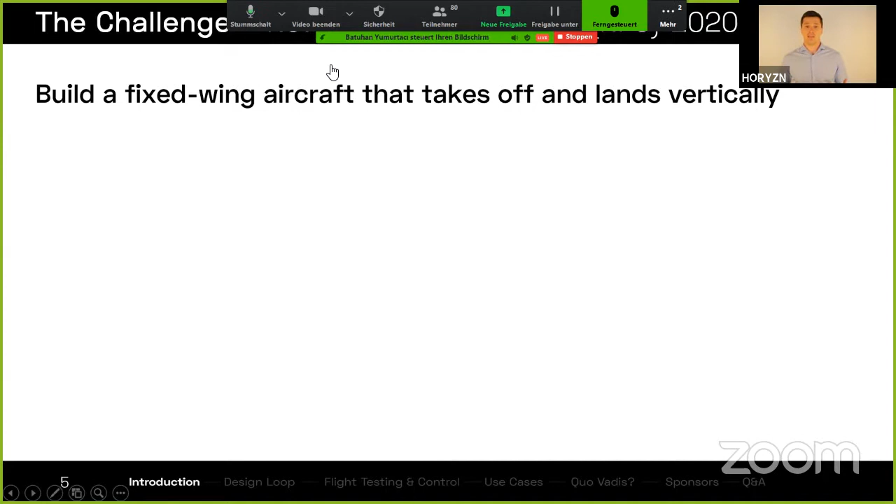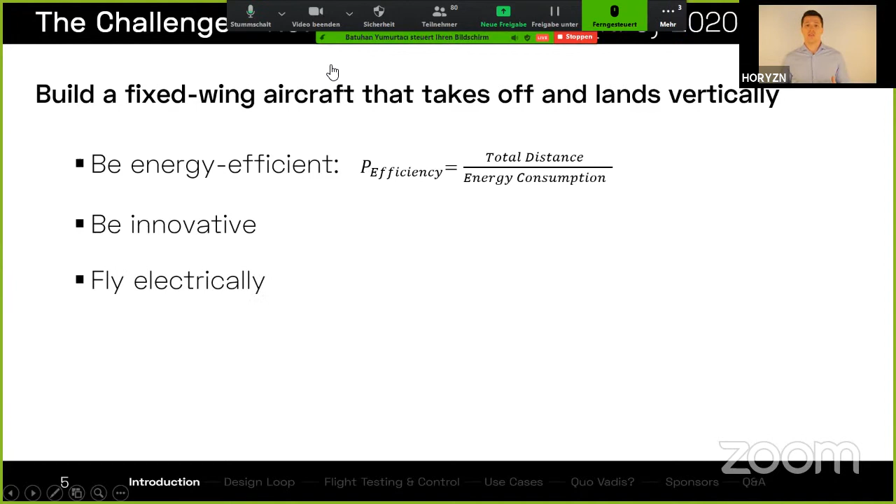Our story began about 8 months ago when we decided to participate in the NFC International competition. The task is to build a fixed-wing aircraft that is able to take off and land vertically. But our aircraft has to be energy efficient, and we get the most of our points for the flight performance, so the total distance divided by the energy consumption. We must also have an innovative design. We have to fly fully electric, and we must carry a 2-kilogram payload measuring about 1 meter. The competition will be taking place at the end of October.

The mission profile is quite challenging and includes taxiing, a 15 minute cruise flight with a minimum flight speed of 60 kilometers per hour, and also looping.

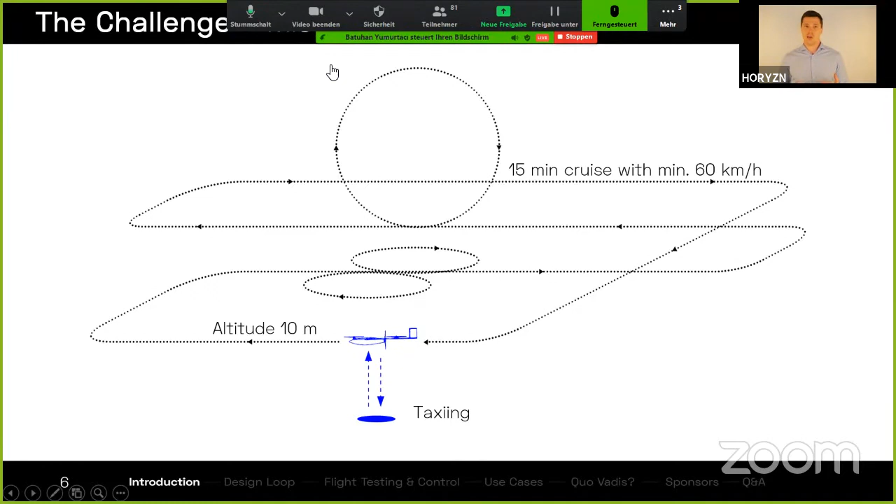So we put this team together. But who are we today? We are 29 bachelor, master, and PhD students. We are from 9 different nations. We are divided into 7 sub-teams, and we have one goal: to win the NFC competition.

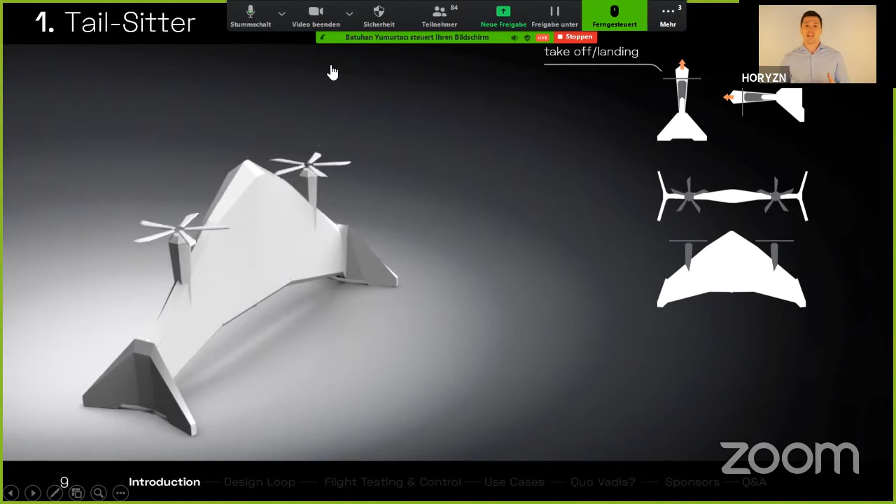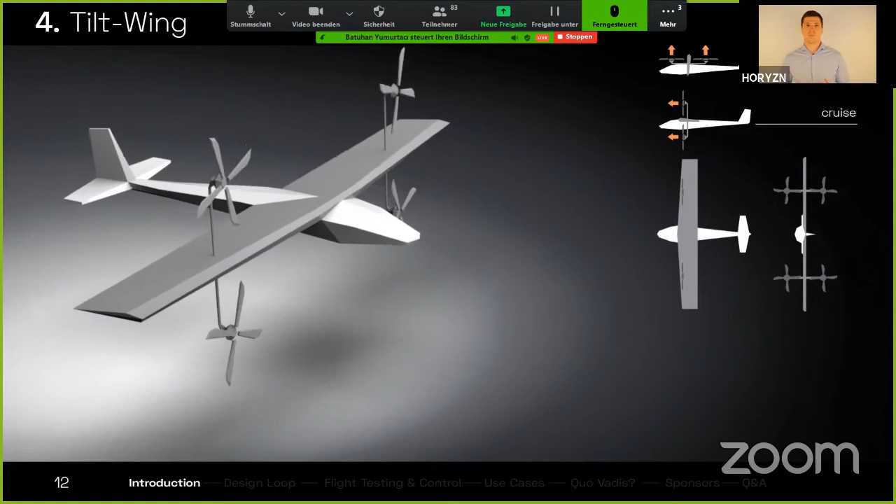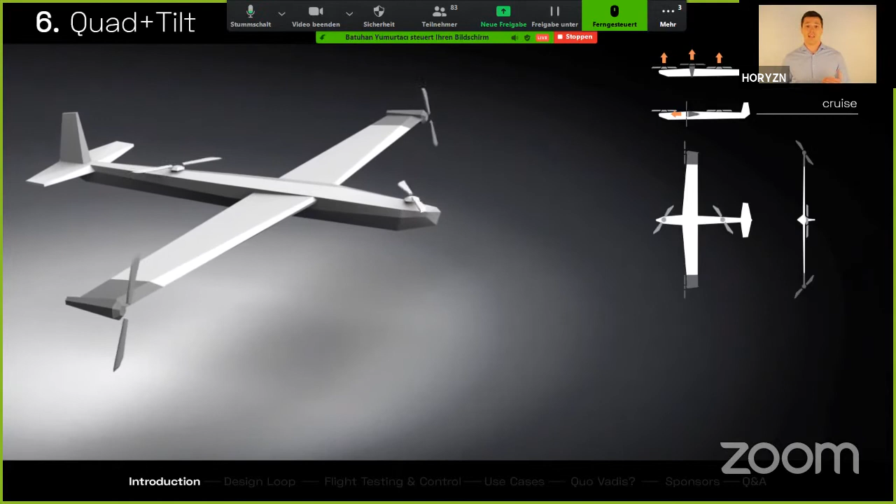So we started the brainstorming process to find an optimal configuration for our mission. We studied the following configurations: the tail-sitter, the tilt-rotor, the Kestrel, the tilt wing, the quadplane, and the Quad+Tilt configuration. From the quadplane and the Quad+Tilt configuration, we derived the final concept.

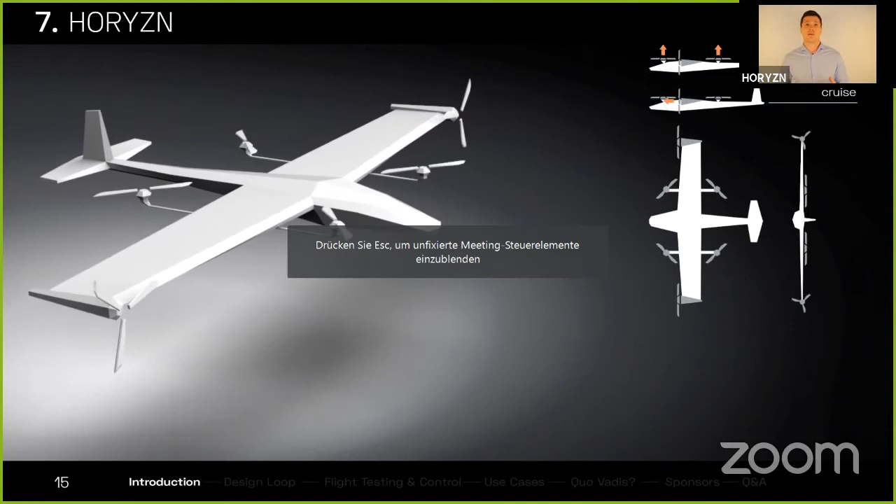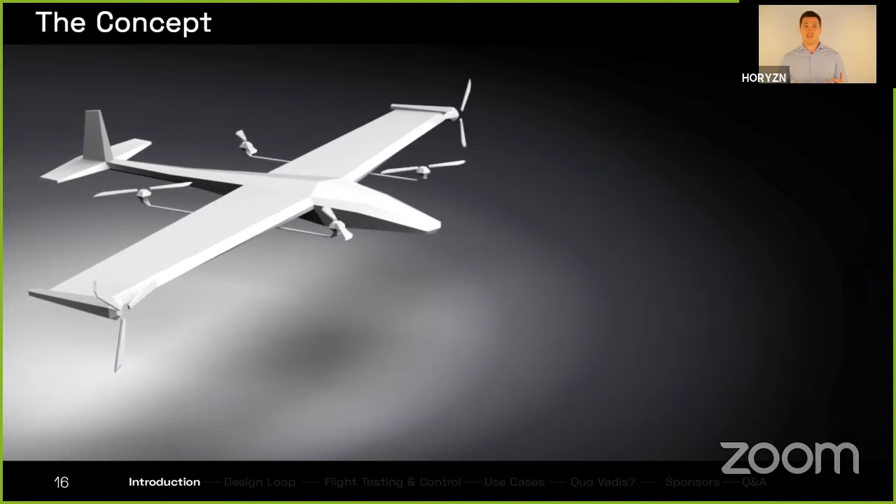I'm proud to say that we finally found a configuration that we called Horyzn. Horyzn is derived from its design goal to be ultra efficient. It deploys 4 hover rotors mounted on booms at the wing and 2 wingtip cruise engines. This innovative configuration combines the simplicity of a conventional quadplane configuration with high maneuverability during the hover phase and a high overall efficiency. The separation of the hover and cruise propulsion simplifies the system complexity, making it less complicated to design and safer to operate.

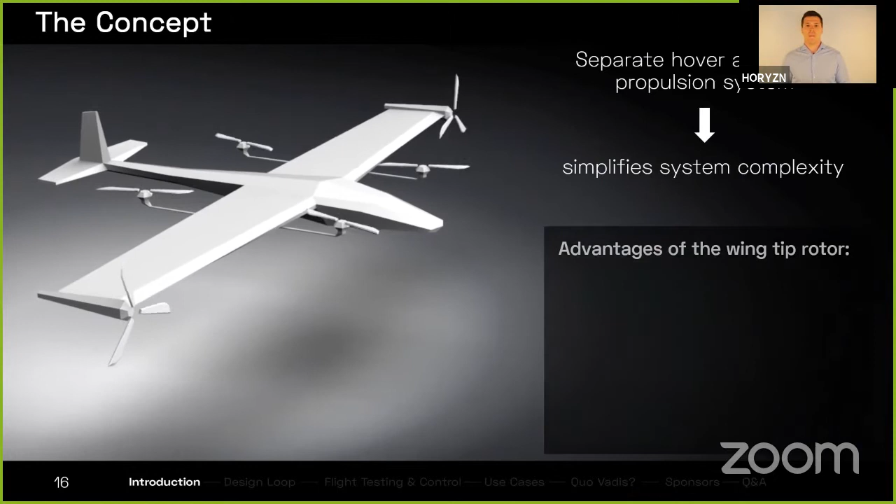But what advantages do we have with the wingtip rotors? Operating in completely undisturbed free stream conditions improves performance significantly. By interacting with the wingtip vortex, the proposed design partly cancels out the induced drag at the wingtip. Deploying differential thrust technology, a high yaw authority during the hover phase is made possible. This enables precise hovering and a high level of control that other configurations cannot provide. And since the differential thrust technology is also used during cruise flight, no rudder is required.

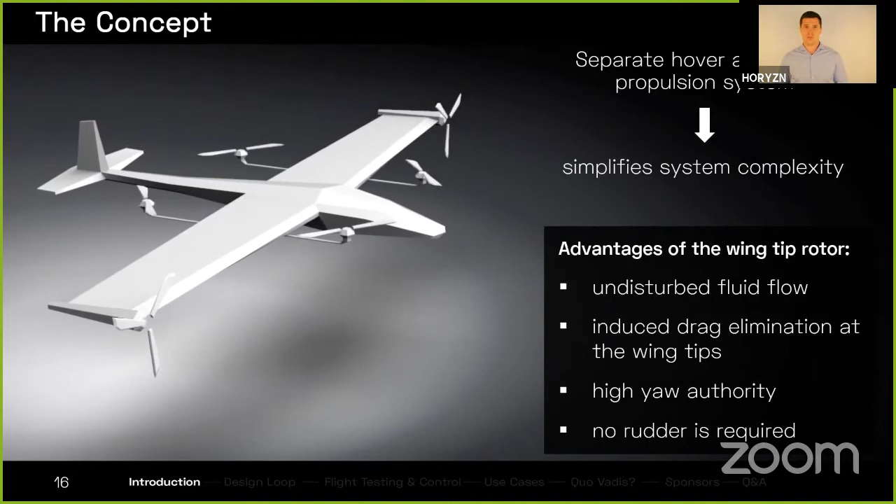So after we selected the configuration, we started the design process. But what does our design process look like, and why is it so special? To explain that, please welcome from the design loop team, Heitor Gardner.

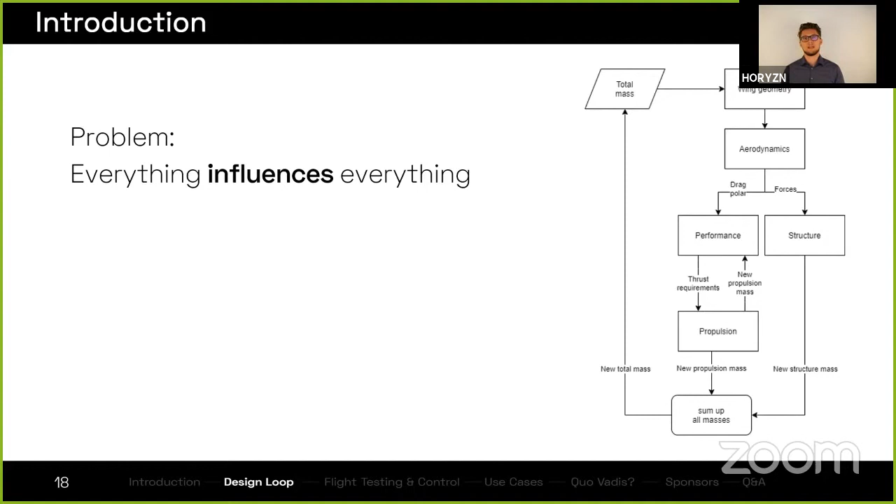Thanks, Balázs. Hello, everyone. So let's start with the design loop process, a quick introduction into this topic. The problem when we want to design an aircraft is that everything influences everything. As you can see in this chart on the right, we start with the total mass. The total mass influences our wing geometry, which then influences our aerodynamics. Later on, for structure calculations, you get a new structure mass. When you choose a propulsion, you get a different propulsion mass. And when you add those masses up, you get something different than you assumed at the beginning. So you have to restart the process all over again. This is called an iterative design loop, and this is what we implemented.

Now I'll show you how we implemented it in our case. We start on the left side with our inputs. Our inputs are the high-level geometry of the aircraft, for example, aspect ratio, wing loading, and certain points of wing and empennage geometry, along with our starting maximal takeoff mass, which is also kind of an output, that's why it's a circle there in the diagram, and also our mission segments.

Now into the design process, the high-level geometry goes into the geometry module, which is something specific for our case. We get into that in a bit. And together with the mass, we go into the aerodynamics. The aerodynamics gives a drag polar into performance and propulsion, and also the forces into the structure.

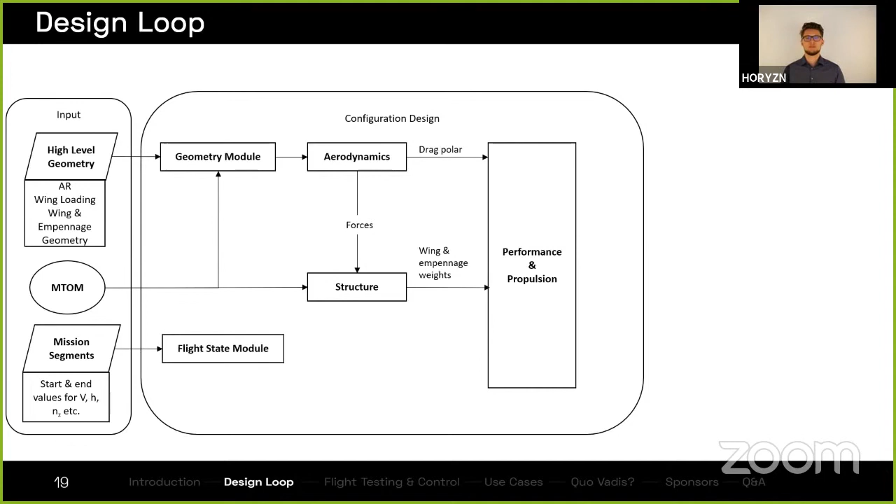And the structure gives us new wing and empennage weights. On the bottom, our mission segments go into the flight state module, which gives flight states into the performance and propulsion calculations. There we receive a new propulsion weight, sum all the masses up, and see if it converged. If it did not converge, we start the process all over again.

And if it converged, then we have one converged configuration. We also know how many points we'll achieve with that specific configuration, because this is actually what we want to optimize for. We want the maximum points possible.

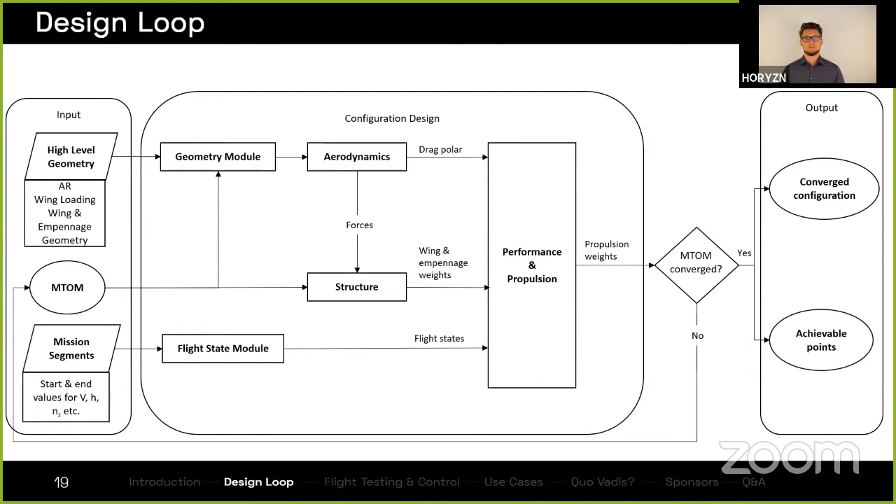So let's go into depth into the applied technology here real quick. We use state-of-the-art software, for example the PAWAT tool from Bauhaus Luftfahrt, which is a 3D aerodynamics calculation tool. Also a big thing here, we use CPACS from DLR, which is an XML-based parametric data exchange format. Together with that, we use Tigl and CPACS Creator, which is also part of that toolbox. We also use the RCE program from DLR, which can do a lot of things, but we use it as our toolchain manager to implement our design loop.

So what's special about our design loop process is that the setup is modular. We can model different aircraft configurations, different mission types, and we can also optimize for different criteria. This gives us huge potential for future applications, for example different competitions or whatever the future might bring up.

Now let's go into the modules of our design loop. We start here on the left with the inputs, and the first module is the geometry module. What happens there is that we have the high-level geometry as an input, which is written inside the CPACS file. We can see a part of that here.

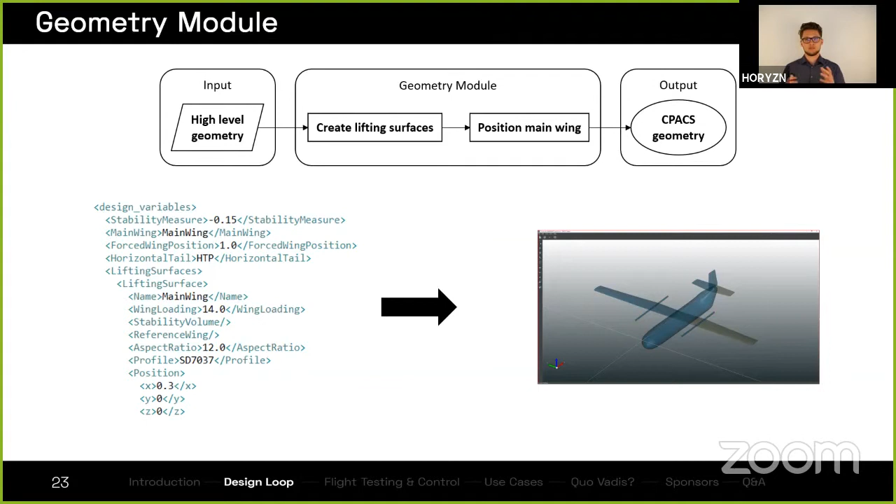It's just XML format. Inside the geometry module, the lifting surfaces get created, and the main wing is positioned so that the stability margin is maintained. As an output, we have the CPACS geometry, which we can see here in the Tigl viewer. In this format, we can actually continue to perform calculations.

Next module is the flight state module. As input, we have our mission segments. For each segment, we have start and end altitude, acceleration, and so on. We also have our operating conditions, for example the flight box size that is given by the competition.

Inside the flight state module, a trajectory gets generated, and as an output we have our flight states. So we know for each trajectory point how fast we're flying, what's the acceleration, we know the flight path angle, we also know the time between two points and so on. With that, we can actually do performance calculations.

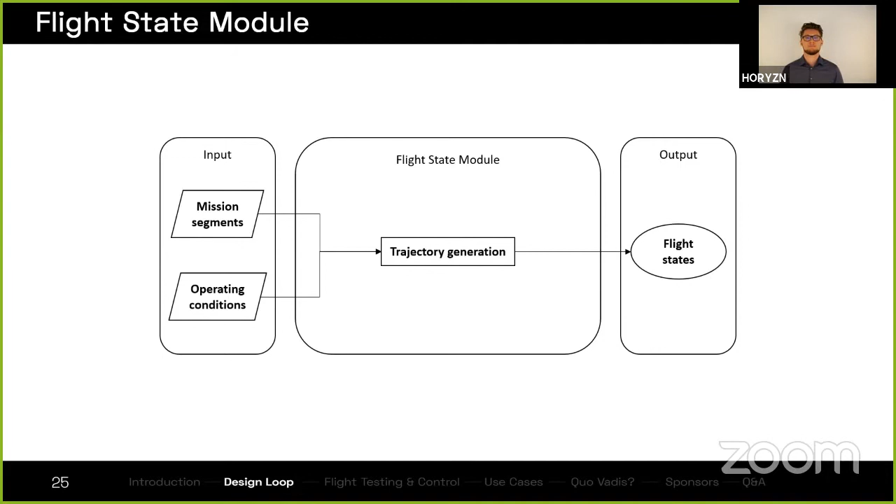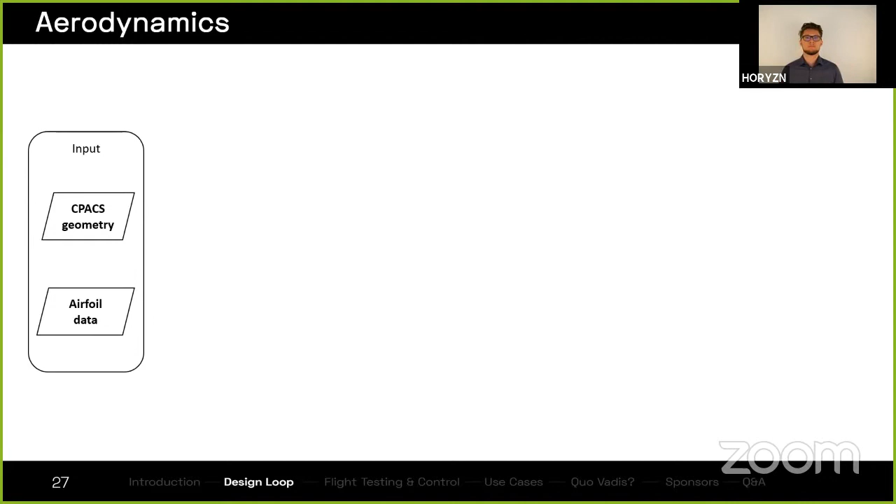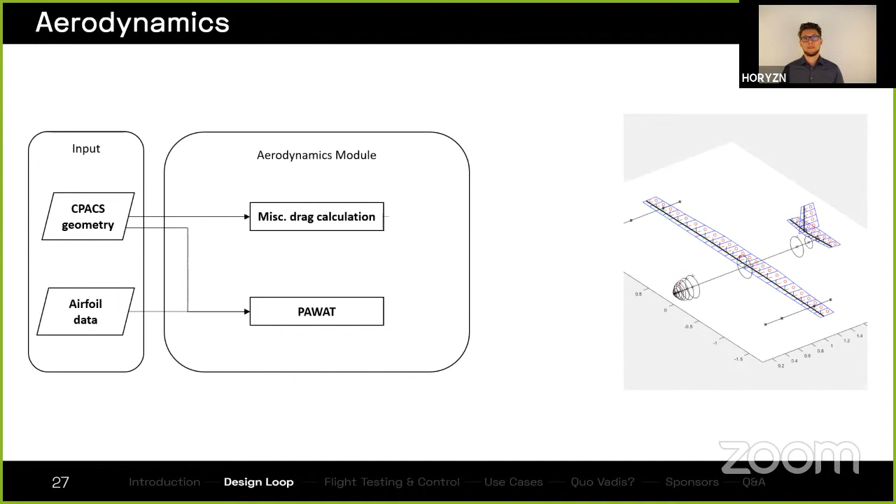Next module is the aerodynamics module. As an input, we have our CPACS geometry and also airfoil data in 2D polars. Inside the aerodynamics module, we calculate the miscellaneous drag. Also with the PAWAT tool, we calculate the 3D aerodynamics. As output, we have our forces and moments, our trimmed 3D polars, and our neutral point position.

On the right, you can see a screenshot of PAWAT. This is how it looks like inside there.

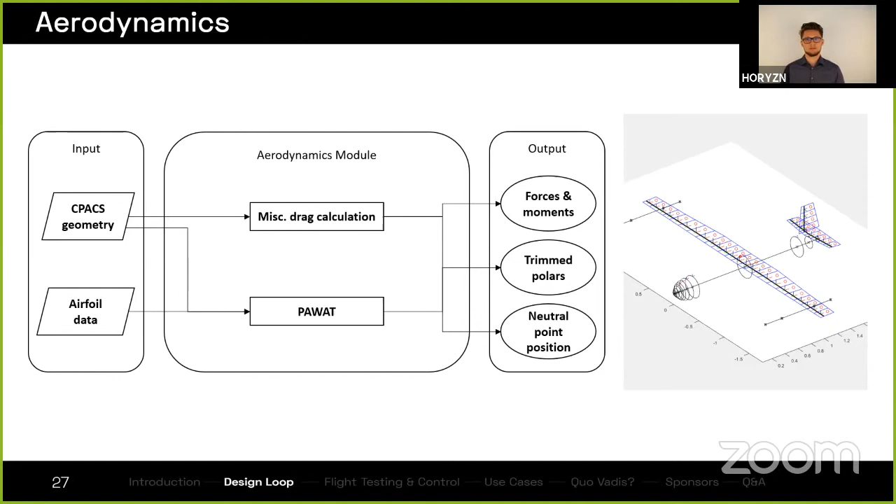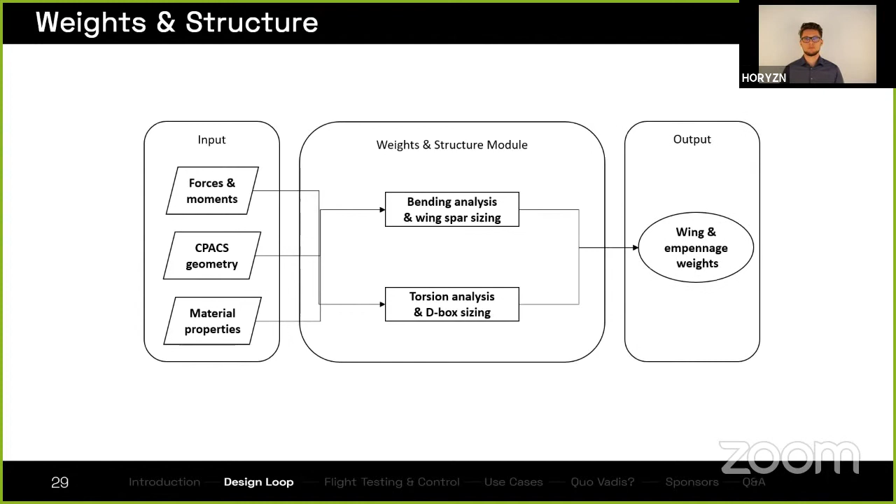So now let's go to the structure. The structure receives the forces and moments at the critical flight states, also the CPACS geometry and material properties. Inside the weights and structure module, we do two things: for one, we analyze the bending, and with that we size the wing spar. On the other side, we do torsion analysis, and with that we size our D-box. As an output, simply we have new wing and empennage weights.

And after that, we go into performance and propulsion, which is actually the heart of our design loop. And for that, I happily introduce you to Balázs Türk-Yılmaz.

Hi Tom. So today I would like to talk to you a little bit about how we calculated our performance and propulsion modules.

So we start just like we did with every other module. We start with our inputs. We have our 3D drag polar, we have our flight states, and we also have our maximum takeoff mass.

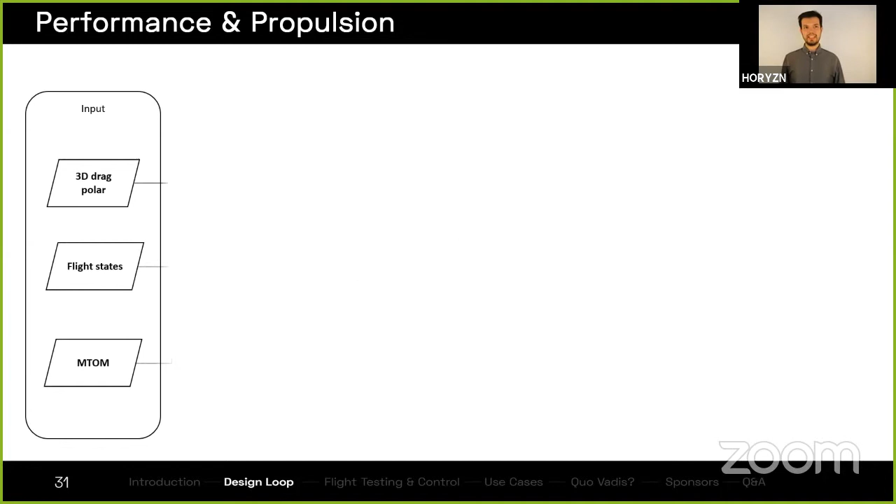With that information, we can calculate how much thrust we need to fly a predetermined mission that we get from the flight state module. And after we know how much thrust we need, we can choose the most efficient propeller that can deliver this thrust.

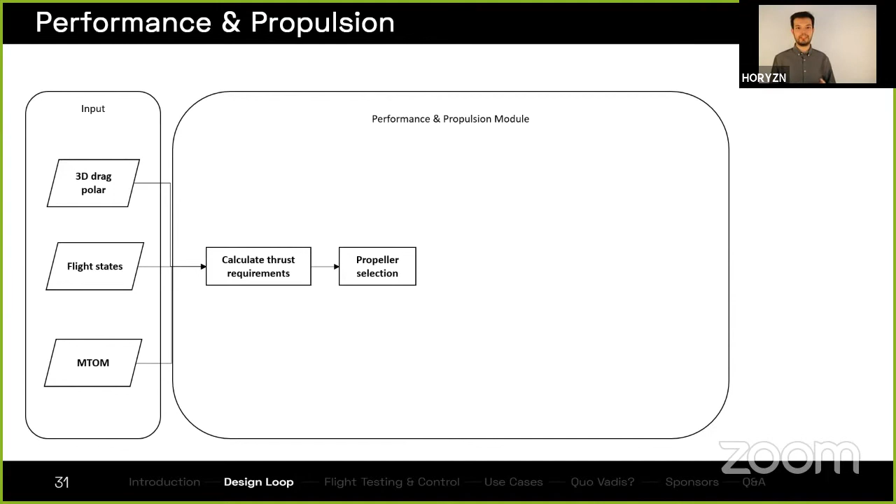And after we've selected our propeller from a large database, we then go on to select our motor, our cable, and our ESC, which can drive this propeller.

And after that selection's successful, we need to size our battery with the amount of serial cells that we need. After we've sized our battery, we have our propulsion mass.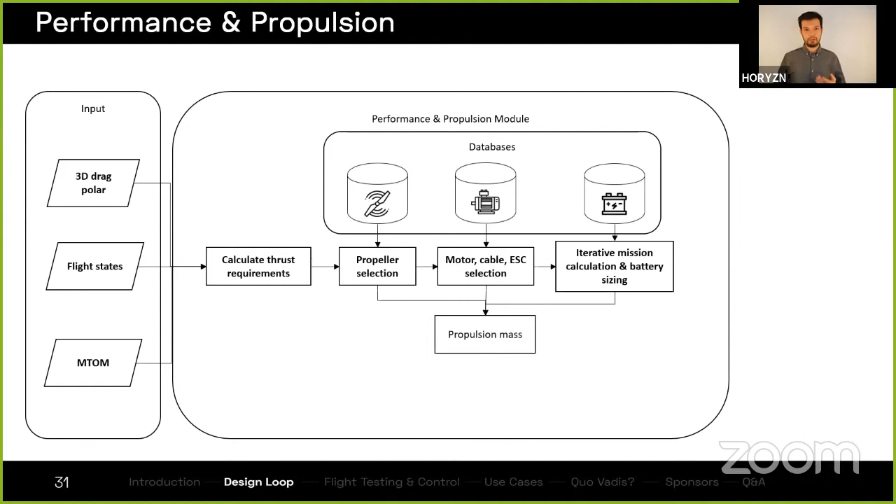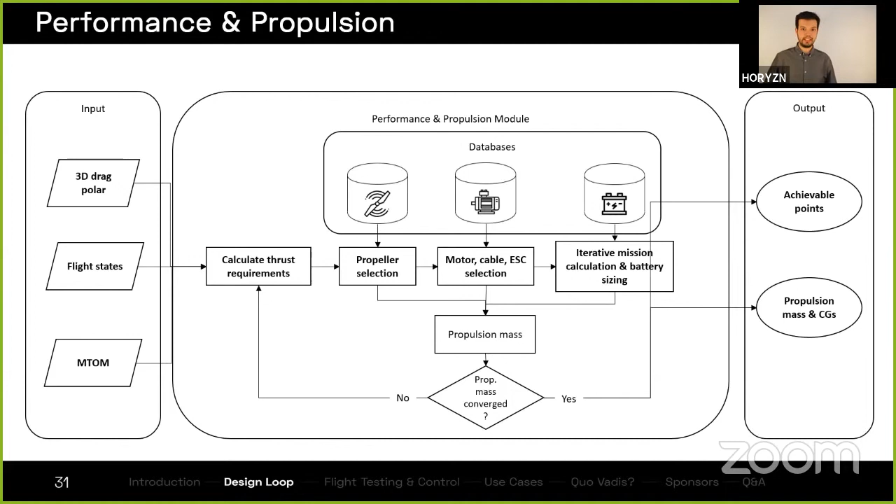And after we know our propulsion mass, we need to check if it's converged or not with the previous iteration. If it has not converged, then we have to calculate our thrust again. And if it has converged, we know which propulsion system we're going to have for a configuration. And we know its properties, its mass, CGs, and we also know how many points we can achieve.

So we're actually at the end of our design loop. So we have to check if our maximum takeoff mass is converged. If no, we have to go back, as Heitor already told us. But if it has converged, we know how many points we can get from the competition, and we also know how our airplane is going to look like.

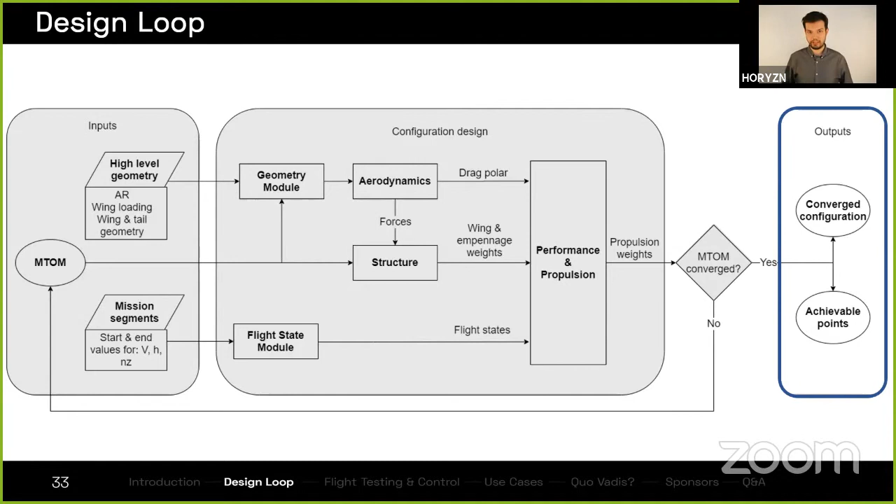So until now, we talked about how we did this theoretically. Now I would like to talk about how we implemented this in software.

So what you can see right now is a screenshot from RCE, from our toolchain manager. And all these small boxes that you can see there, those are the modules that we explained beforehand. But one module we did not explain, and that module enables us to conduct parametric studies. And this is that module. This is design of experiments.

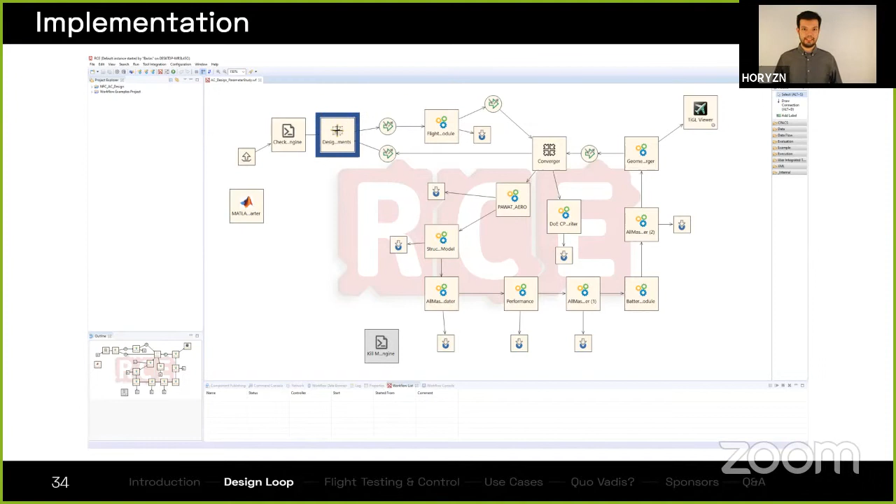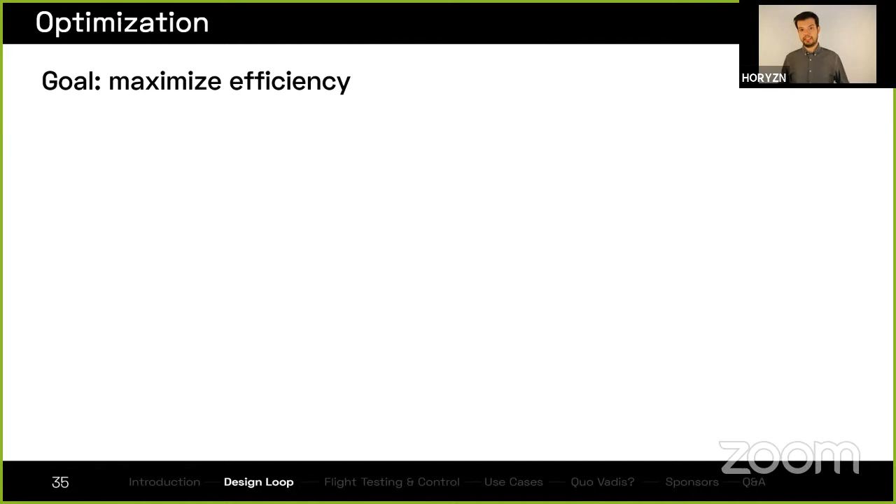So how did we optimize? How did we go forward with picking the best configuration? So our goal is, as already mentioned, to maximize energy efficiency. In our case, this is travel distance divided through energy. And to do that, first of all, we looked at which cruise speed we need to be.

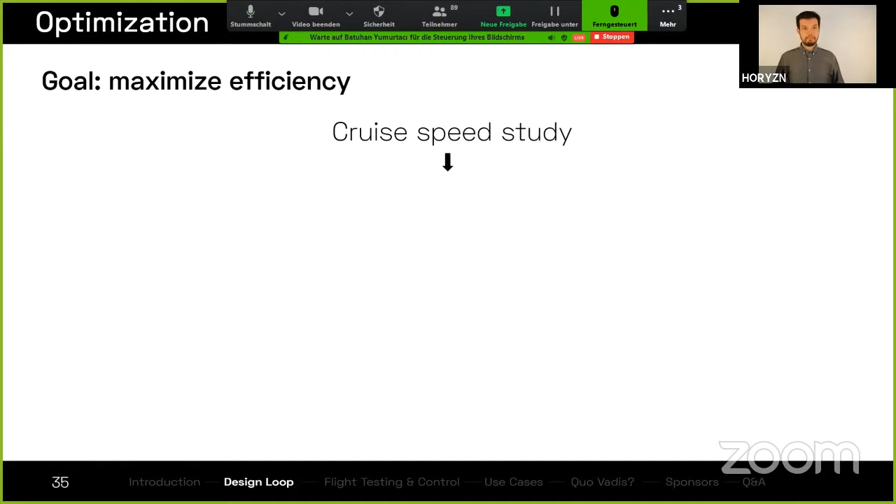After we've determined an optimal cruise speed for all flight states, we did an aspect ratio and wing loading study. So we wanted to determine how our wing looked like first. And then we did a taper ratio study. And after that, we had an optimal wing geometry for a cruise speed.

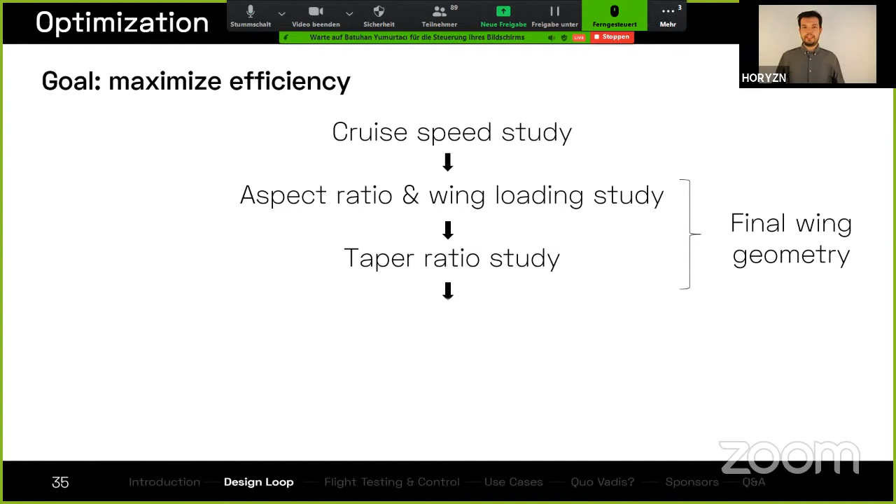And after we had our wing geometry, we went ahead and optimized the empennage. So how much does the aspect ratio have to be? What does the taper ratio have to be, and so on. And after we did that, we did a propeller diameter constraint study. And that gives us also an optimal propeller.

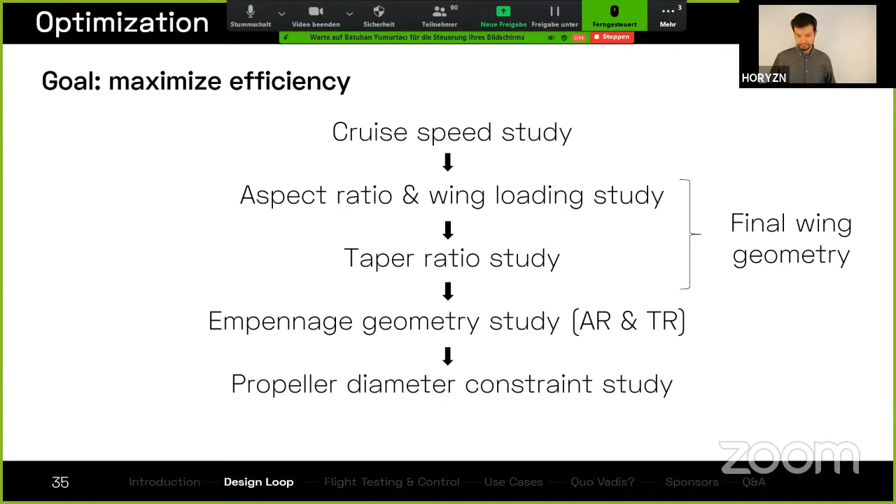So those are more or less the results that resulted. We have a takeoff mass of almost 13.5 kilos with a wing loading of 14 kilos per square meter, with an aspect ratio of 13, cruise speed of 20 meters per second, a stall speed of 12.3 meters per second, with a total energy demand of 140 watt-hours and with 138 points.

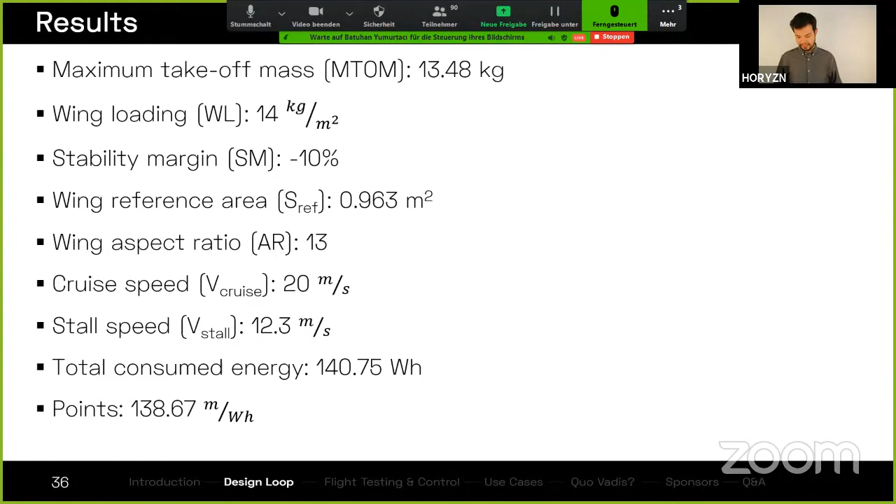And this is how it looks like in CAD.

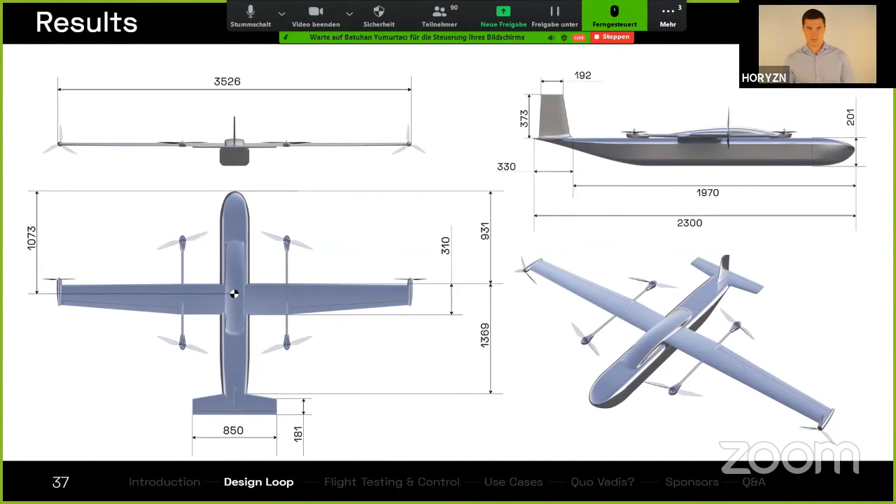So now we heard how we design our aircraft, but how do we perform on the airfield and in the workshop. Our next speaker didn't have the opportunity to fly back to Germany due to the current regulations of the coronavirus. So he is now live from Turkey. Please welcome on the stage, Batuhan Yumurtacı.

Thank you, Balázs. Hello, everyone. I hope you can all hear me well. So today, I'm going to talk about our prototyping and testing process.

Our philosophy is to build fast and fail early. This means that starting from day one, we had our prototypes that we have been using as flying test platforms to gain experience, to identify the upcoming problems, and also to find and implement our own solutions.

Let me start by talking about our prototypes. The first prototype we have is called Frankenstein. This is also the model that we have conducted our first flight tests using an autopilot system. One of the main goals with Frankenstein is to check the compatibility of onboard electronics and also to learn how to conduct a flight test as a team.

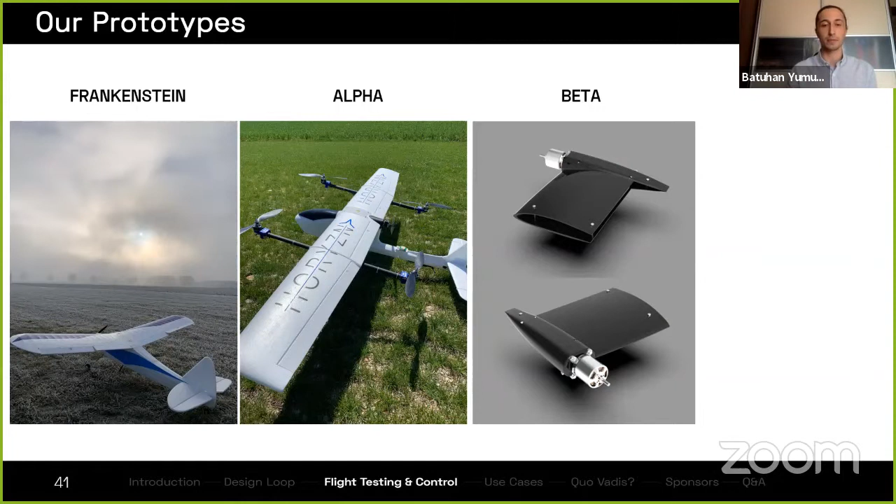The final aircraft we will have is called Gamma. For Gamma, we are going to use all the optimized parameters from Design Loop and the experience we have gained from our prior prototypes.

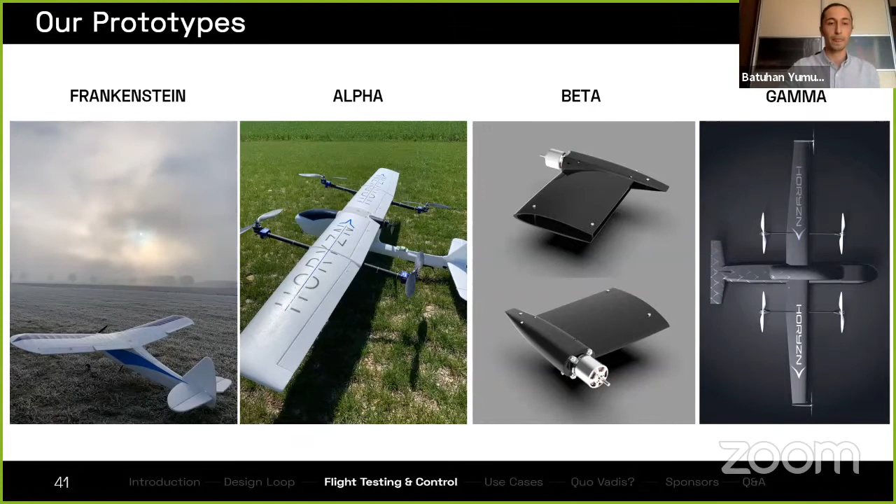So how does a typical flight test actually look like, and what do we do with our prototypes? We just don't go to the field and hope that everything works well - that's the reason why we call it a flight test rather than a flight attempt. Before each flight, we set our goals and go through the steps we are going to follow during the flight test. We have our pre-flight briefing to bring every participant to the same awareness level.

During the flight, we have a standard procedure and go through our test cards. After the flight, we have our debriefing round where we assess the flight, write down the problems we had, and also the goals we have achieved. Another important aspect about the post-flight is the data analysis - we get our data logs, analyze them, and compare them with our prior flight tests. Based on all that information, we go back to the lab and improve our setup.

Here you can see some pictures from our flight tests. On the left, you can see the van provided by the Institute of Aircraft Design. Inside that van, we have all the necessary equipment so that we can build our ground control station and have a secure data connection with the aircraft as it's flying. On the right, you can see an example plot of our data analysis. For instance, this one shows the vibrations during the hover phase of Alpha prototype along each axis of the aircraft.

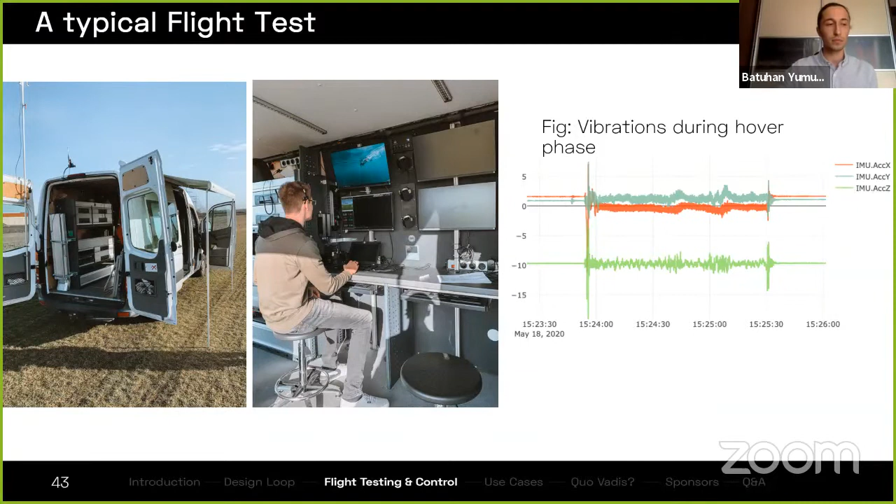Before handing off, I would like to also mention the flight phases we have and how we fly with our prototypes. The first mode we have is hover mode. In hover mode, we just perform the vertical takeoff like a common multi-copter. Then we switch to transition mode. In that mode, all the motors are active, thus the aircraft gains a forward acceleration.

Depending on the airspeed and after some threshold, the power is transferred from the hover propulsion to the cruise propulsion, and after that we switch to cruise mode. In that mode, this is actually a typical fixed wing flight, and we just use the cruise motor and the control surfaces. For the landing, we follow the same procedure backwards, and in that case, instead of accelerating in the transition phase, we decelerate.

All right, so now we are going to watch a short video clip from our flight tests.

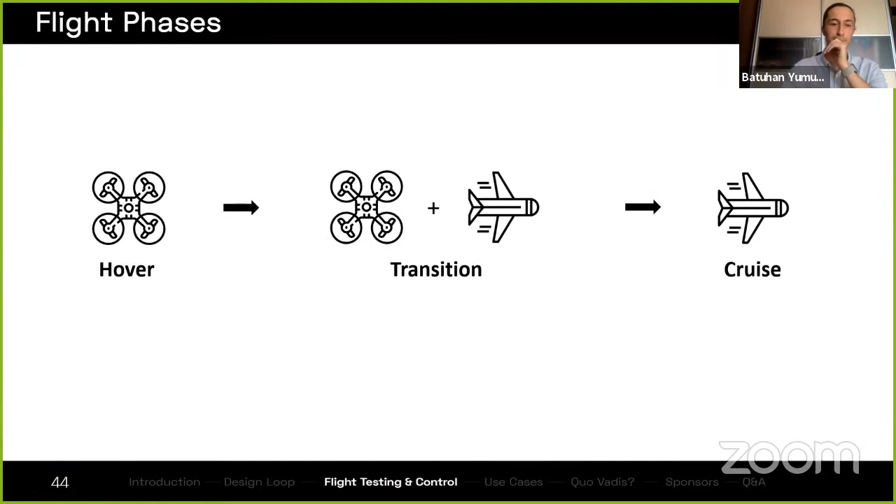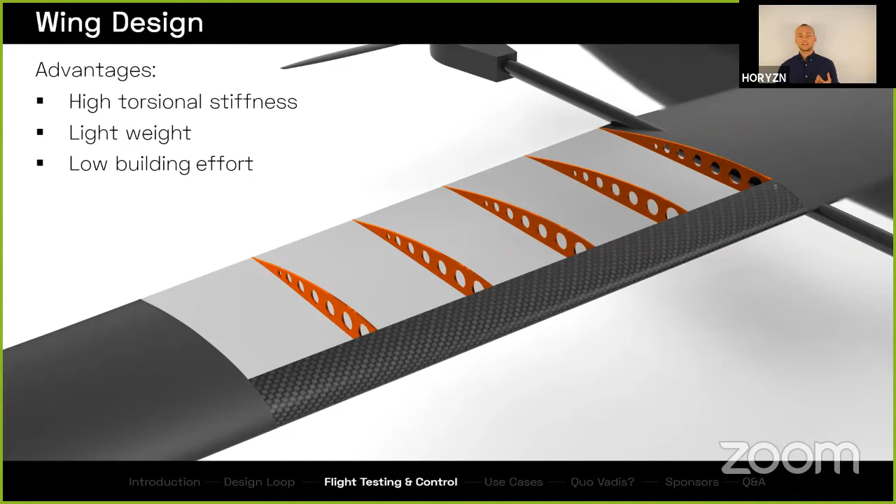So one solution to solve this problem is to manufacture those connectors out of carbon fiber, and then you can save around 1 kilogram of total mass. The advantages of a fuselage like this are high stability and light weight.

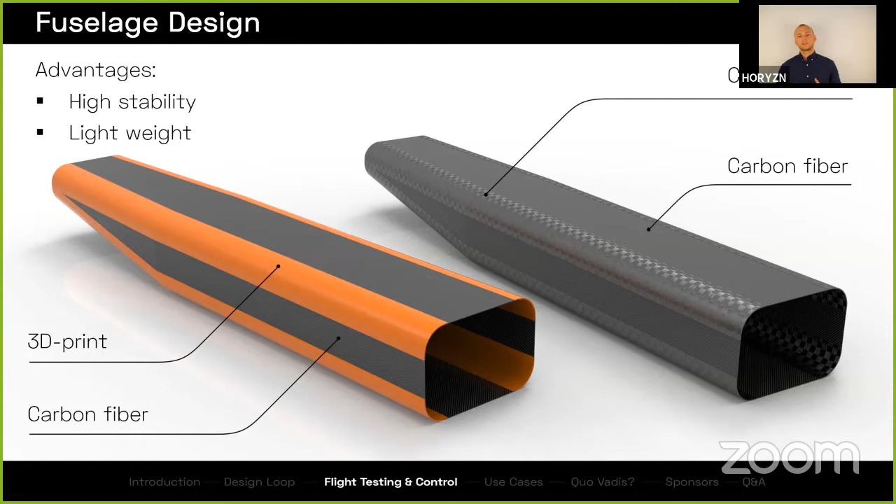At one point we asked ourselves whether it may be more efficient to taxi with an electric actuated landing gear, which means attaching an electric motor to the rear axle, because we have a taxi distance of around 80 meters. So we listed the pros and cons of using such a mechanism.

The advantages are, for example, that we would get innovation points for the competition. The total energy consumption would be way lower, around 10 times, and noise reduction on ground would also be better. But compared to that, the disadvantages are the added complexity to the system and the weight that is present during the entire mission. Also, such a landing gear is only economic for longer taxi distances.

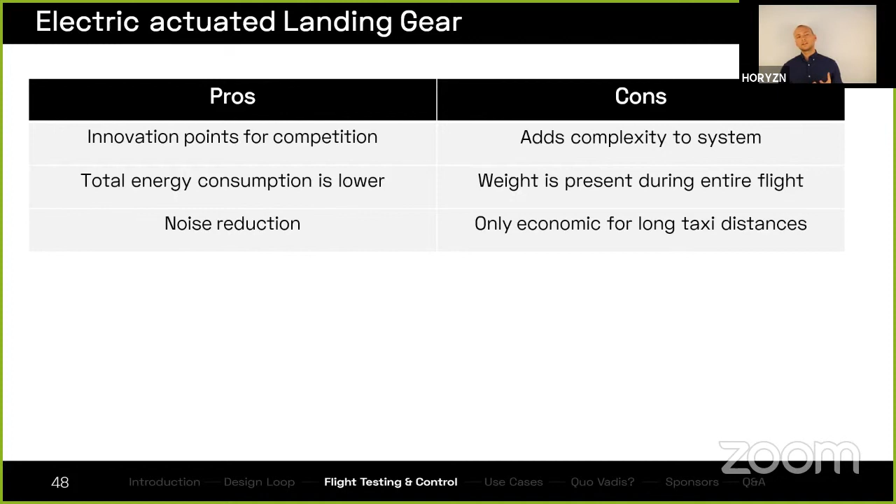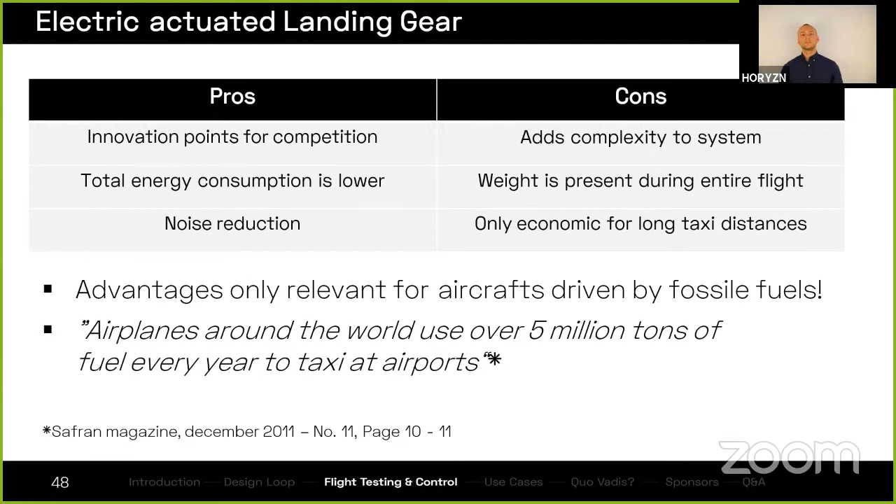So we concluded that the advantages are only relevant for aircraft driven by fossil fuels, which is not the case for our design. I found a quote which sums everything up: airplanes around the world use over 5 million tons of fuel every year to taxi at airports.

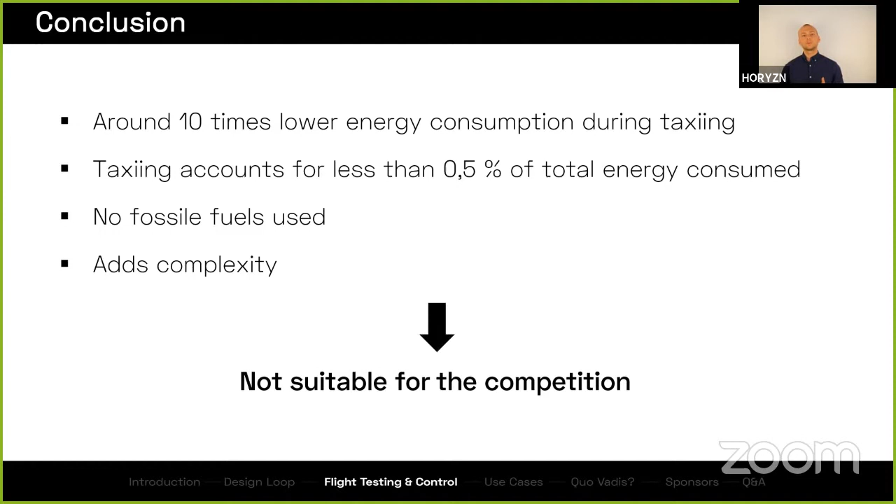So in a nutshell, you are way more energy efficient, around 10 times, like I've already mentioned. But we only have 80 meters of taxi distance in total, which is around 0.5% of the total energy consumed in the whole mission. We do not use any fossil fuels, and the complexity added to the whole system is way too overwhelming. So we will not build an electric actuated landing gear.

Another question we asked ourselves, because you saw the design earlier with the 4 hover motors: how can we stop the uncontrollable spinning of the 4 hover motors during cruise flight? We thought about reducing the drag of the spinning inactive propellers by aligning the propellers with the flight direction. So the requirements are low mass and a small amount of mechanical parts that could potentially fail.

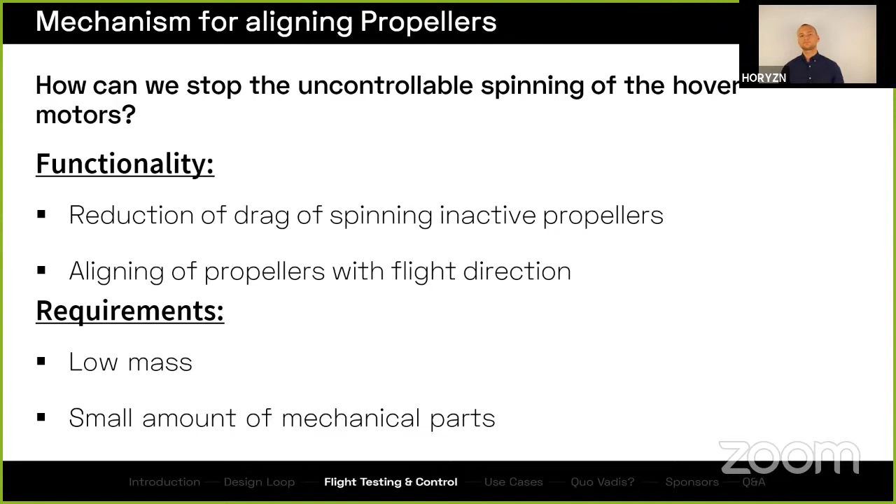In this slide you can see our solution illustrated. Long story short, I'll sum everything up for you. There is an infrared sensor in proximity to the rotor, and the sensor can detect whether a white stripe, attached to the rotor, passes by the sensor or not.

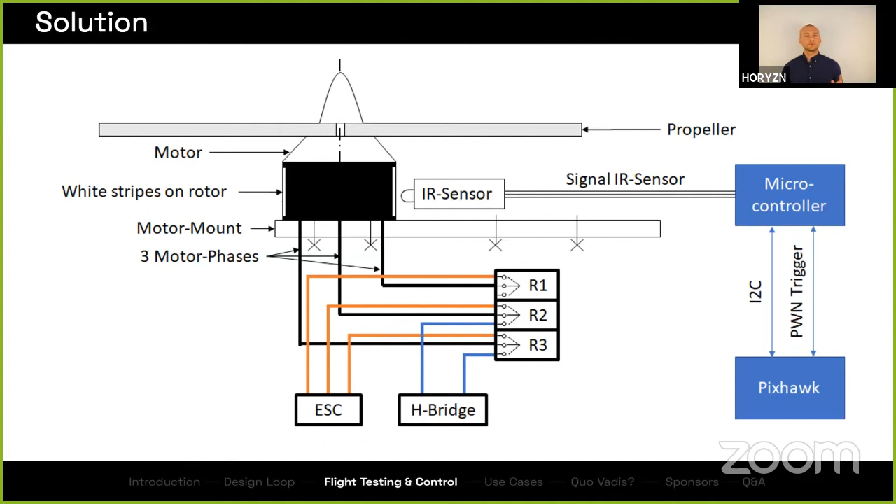If the rotor passes by the IR sensor, a signal is generated, which is passed through a microcontroller, on which the RPMs and position of the rotor are calculated. Our flight controller, the Pixhawk, gives some kind of trigger signal to the microcontroller, which then starts its logic, and the relay circuit mentioned down there can switch between normal operation mode and holding operation mode.

So with this solution, we try to have as few mechanical parts as possible and a low additional mass, but we also have to say extensive testing is necessary, because we want to prevent unwanted states, for example holding the rotors during our hovering. So those were some technical details, some of many, I have to say. Thank you for your attention, and now back to Balázs.

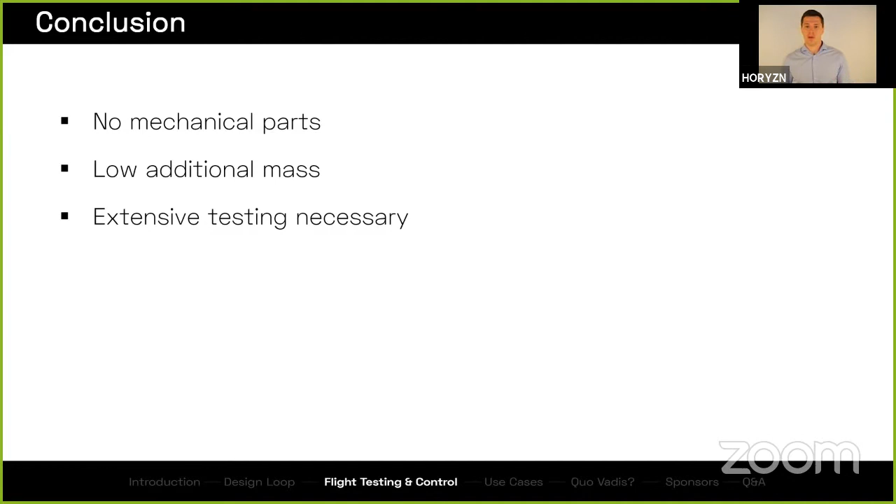So we heard about our aircraft design process from Heitor and Balázs, and Batuhan and Julian have shown our prototyping process, how it looks like. But which real-world problems could we solve with our aircraft? From the business team, please welcome Sonja Tluhoš.

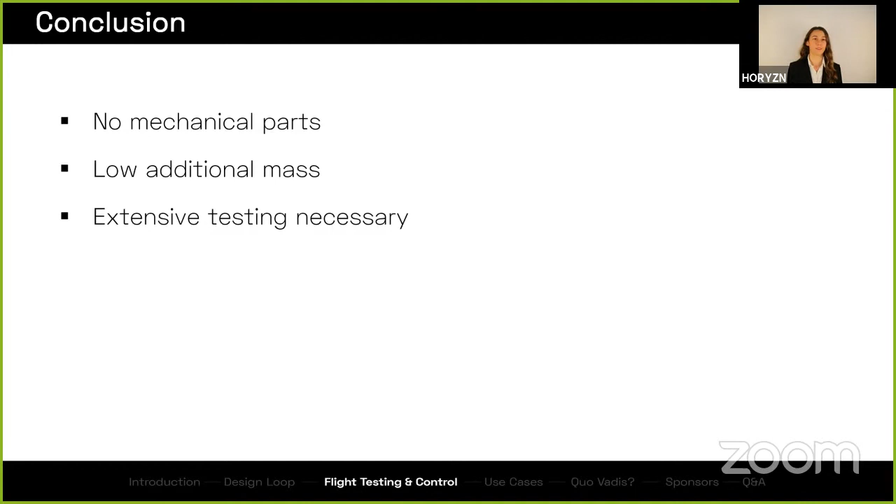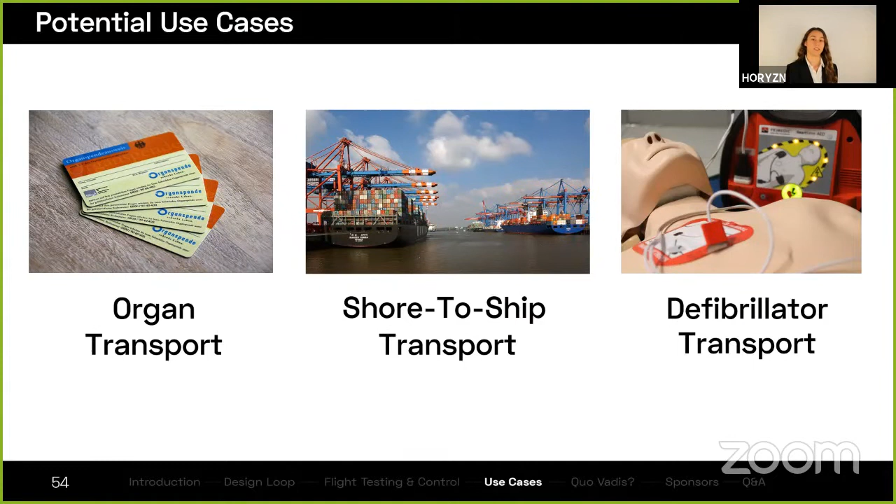One of them would be the organ transport, the shore-to-ship transport, or the defibrillator transport. As we do not have that much time today, I will only be talking about the defibrillator transport. The defibrillator is a device used if somebody has a cardiac arrest, which means the heart stops beating. So let's take a look at the current process.

Right now, if a person has a cardiac arrest and you are a bystander, you should immediately call 911, or in Germany 112. Then you should start doing CPR. The control center will then call the nearest ambulance and the ambulance will come to the scene. That whole process takes about 9 minutes until the first shock can be applied.

The control center also notifies persons called first responders. Those are first aiders who have voluntarily signed up, for example via the smartphone app Mobile Retter. Those first responders are really important for this use case because you cannot use the defibrillator if there's only one bystander. You need 2 bystanders because you shouldn't stop doing CPR to apply the defibrillator. It's also important to know that the first responders do not have a defibrillator with them. That's why we should use UAVs.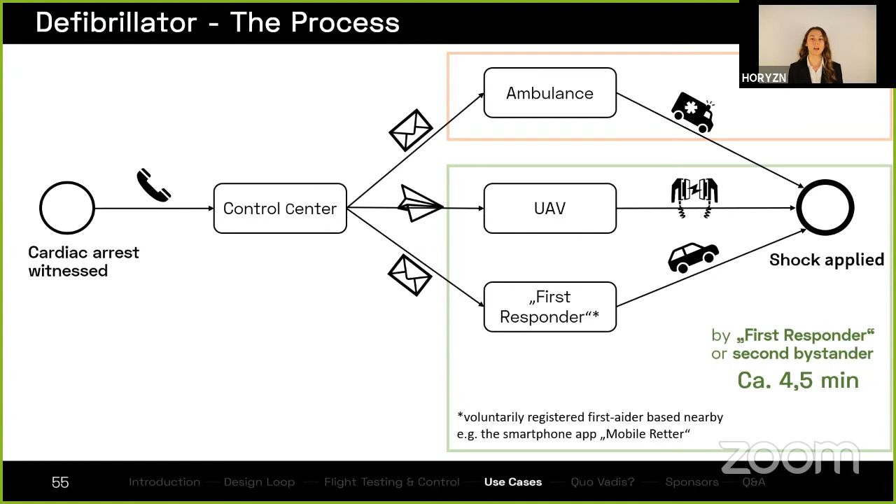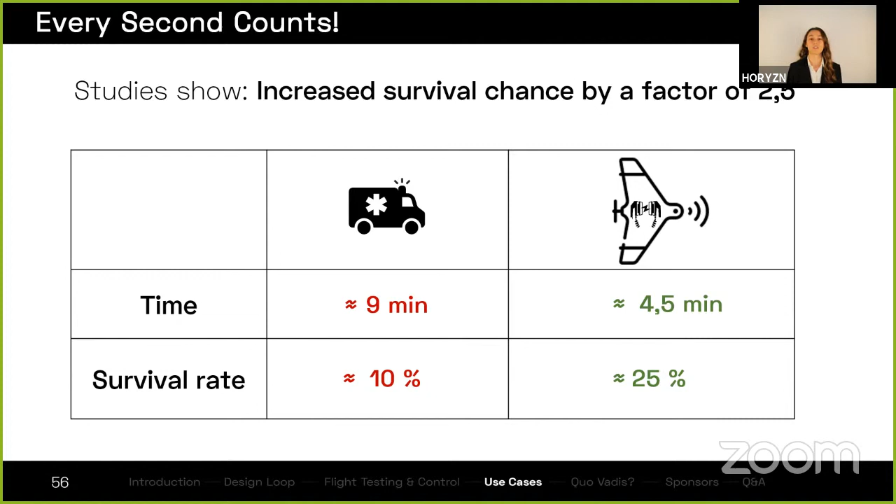UAVs would bring the defibrillator to the scene so that the shock can be applied. By using UAVs, we would cut the whole time in half. By cutting the time until the first shock can be applied in half, we would add a survival chance of about 15%. Now let's take a look at the total addressable market.

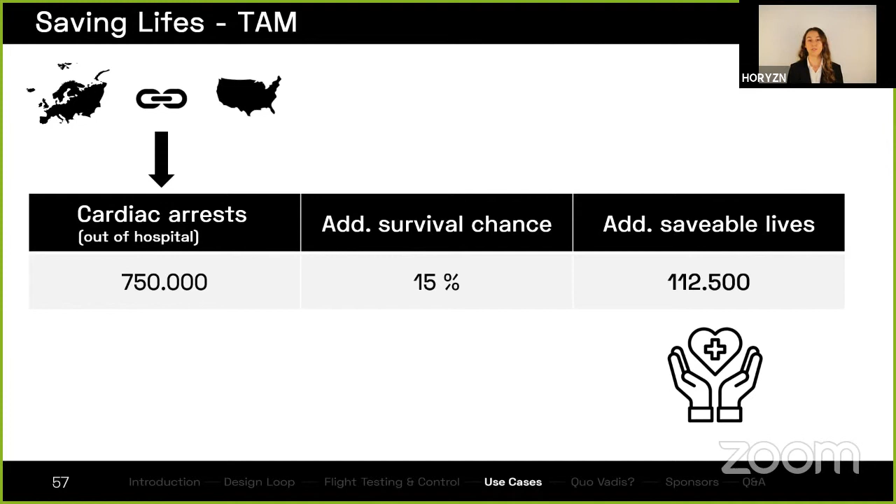If we add up the out-of-hospital cardiac arrests from Europe and America, we would get 750,000 out-of-hospital cardiac arrests per year. If we multiply that with the added survival chance, we would be able to save 112,500 lives each year.

Now, it's difficult to put a price tag on lives. We have an institute called the ICER, which evaluates new medical innovations and determines when that product would be profitable on the market. The ICER suggests that one quality-adjusted life year would be worth $100,000. A person who has survived the cardiac arrest where the defibrillator was used has about 4.8 years left to live. If we multiply that all together, the total addressable market would be $54 billion.

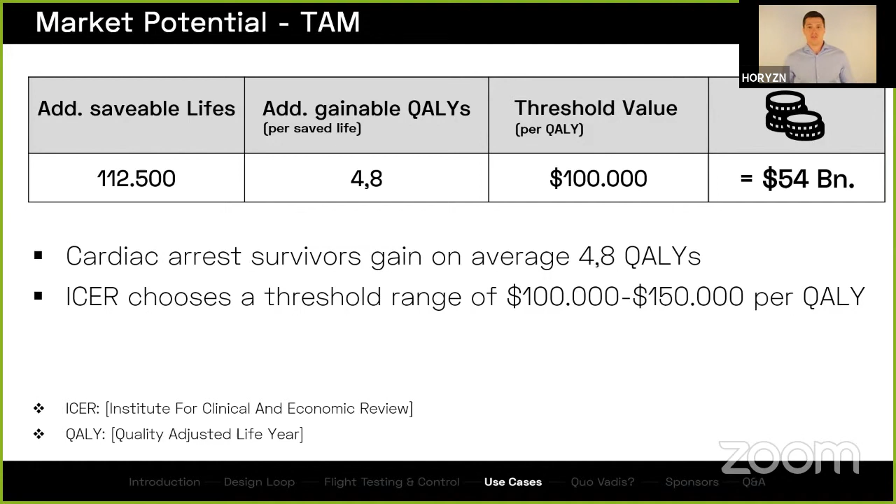You may ask, what could we do after the NFC competition? Our short-term goal is to collect further experience and know-how in developing fixed-wing UAVs. We will compete in a larger competition next year. This will make us ready for our long-term goal, which is to develop a UAV for a specific real-world application.

To make this vision become a reality, we will need you.